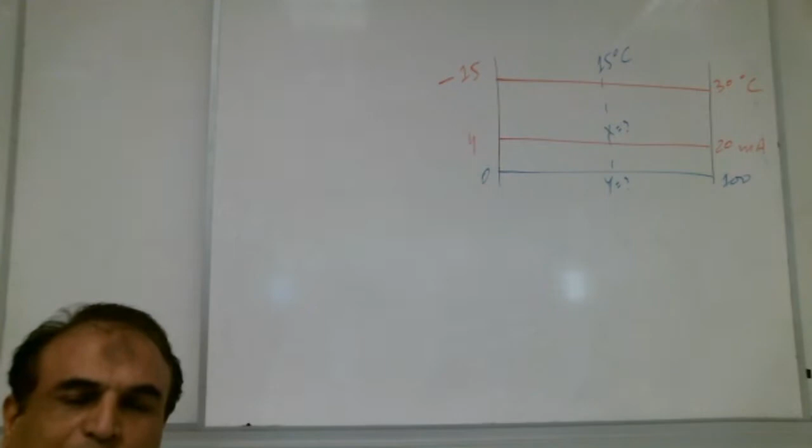Shabab, you guys can see the board, right? Yes. So the question is already there. The temperature is from minus 15 to 30 degrees centigrade, right Shabab? See here, minus 15 to 30 degrees centigrade, this is the range of the temperature. We need to convert into milliampere. The standard signal is 4 to 20 milliampere, and we need to convert into percentage signal from 0 to 100%. So please solve it, get the first.

Solve it and show me. Get the first.

Some brother is trying, Shabab. Yes, I am trying. That's good, a lot of brothers are sending me the message. Teacher, I finish, just please show me. What is your answer? I will show you teacher, please, one minute.

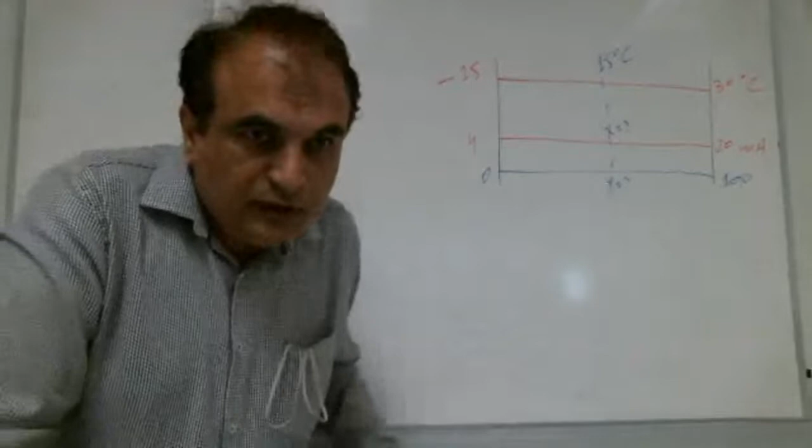Teacher, you see? X minus 4, 20 minus 4, then 15 minus minus 15 over 30 minus minus 15.

That's good, your procedure is correct. Y minus 0 over 100 minus 0, 15 minus minus 15 over 30 minus minus 15. So your procedure is correct. So what is your ID, brother? Tell me your ID.

I want to tell you something teacher, there are 2 students with the last 3 digits 158, so be careful. No problem, you please, tell me your ID. 391 902 158. That's 902 158, okay good.

Shabab, please see here, other brothers see here. So this brother will help me in doing it. Very good, this brother Awad is also showing, Ali Ahmad Awad. A lot of other brothers are also showing. Very good, brothers, very nice. So yes brother, tell me how to write the X.

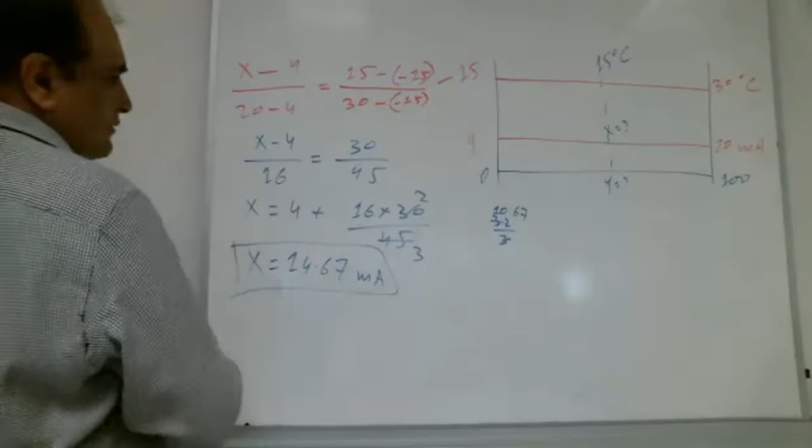Okay Shabab, how are we going to write the other part, the percentage part? Y minus 0 over 100 minus 0 is equal to same 30 over 45. Right Shabab?

Everybody with me, Shabab? Yes, with you teacher. So Y is equal to 30 into 100 over 45. How much, Shabab? 66.667, that's 66.66%. Right Shabab? Yes. Any question up to here, please ask.

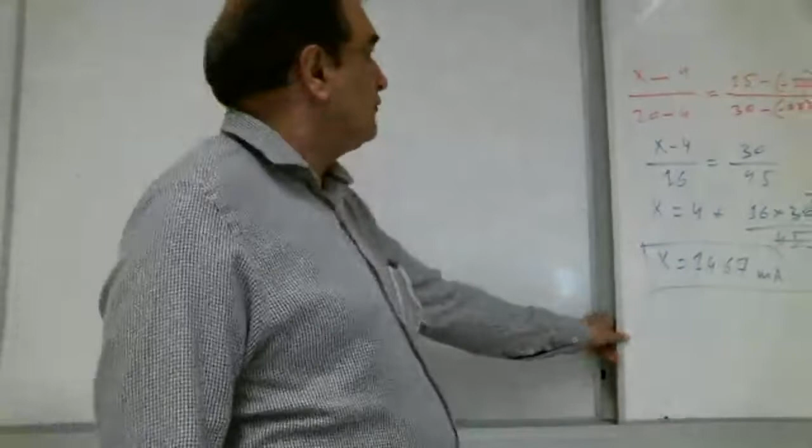Yes Shabab, who will read the next question? Question 1.5 on page 15, please read. Yes Shabab, please read the question 1.5, page 15. Yes Shabab, who's writing? Teacher, in which book, practical book? No, no, in theory book.

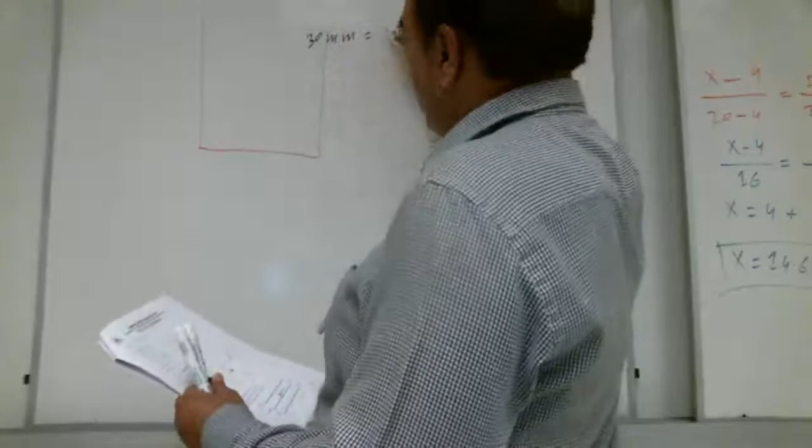So, what is the calibration, Shabab? 30 millimeter equal to 4 milliampere, right? This is the calibration for this level tank, right?

Shabab with me? Okay, now what is the current process variable? Right now, how much does the tank have? 70 millimeter. Right now the tank has 70 millimeter. So we need to find PV, in milliampere and percentage. Both PV we need to find.

That's good, lot of brothers they are replying yes. Okay Shabab, what is the procedure? We always draw the two lines. How do we draw the two lines? Like this.

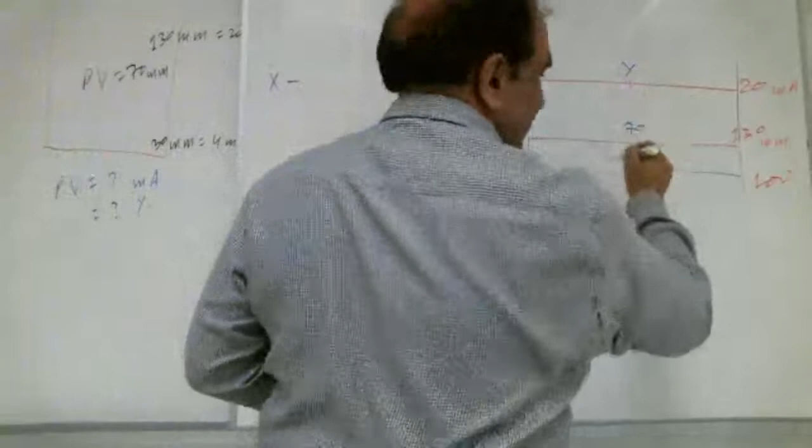So how will we find X? Use the two-line method, teacher. X minus 4. So here it is X, and how much is here? 70 millimeter, right Shabab? So X minus 4 over 20 minus 4.

20 minus 4 is equal to 70 minus 30, over 130 minus 30. So how much is this, Shabab? X equals 10.4.

You are correct, but let's solve it a little bit. So 70 minus 30, how much, Shabab? 40 over 100. So it will be X is equal to 4 plus 4 into 16 by 10, right Shabab? So it will be equal to 10.4 milliampere.

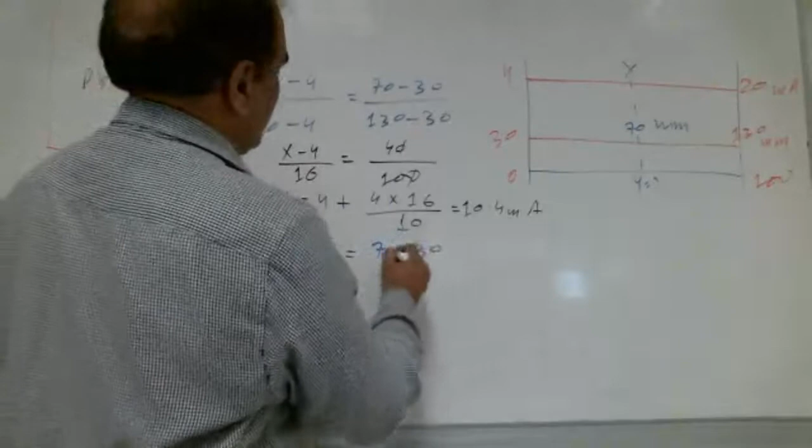Y equal 40%. And Y is equal to, same way, we're going to write Y minus 0 over 100 minus 0 is equal to 70 minus 30 over 130 minus 30. That will bring Y is equal to 40%. Everybody with me, Shabab?

Yes teacher, yes, that's good. Lot of brothers they are saying yes, inshallah. That's good, yes. Read the part B, brother. Now what is the part B? Yashima, please read the part B.

So we put here one. Let me draw it a little lower because it is not coming in the camera correctly. So we have a tank here. Its calibration is 30 millimeter, 4 milliampere, 130 millimeter, 20 milliampere. This is the calibration. Here we put a temperature indicator transmitter, a level indicator transmitter, Shabab.

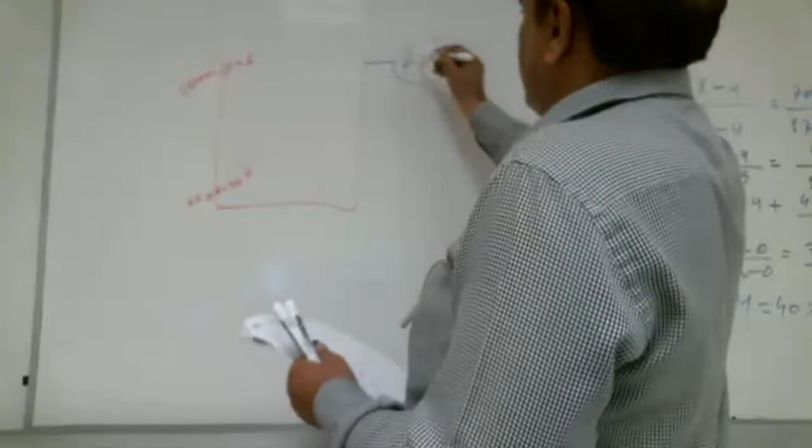Level indicator transmitter, that will send the signal to the level indicator controller. This is the set point. This is what, Shabab? Electrical signal, teacher. PV. Very good. Lot of brothers they are replying PV. Very good, Shabab.

This is coming here. We put here I to P converter, and on this side we put the valve. Control valve is there, and this control valve is, Shabab, normally open or normally closed?

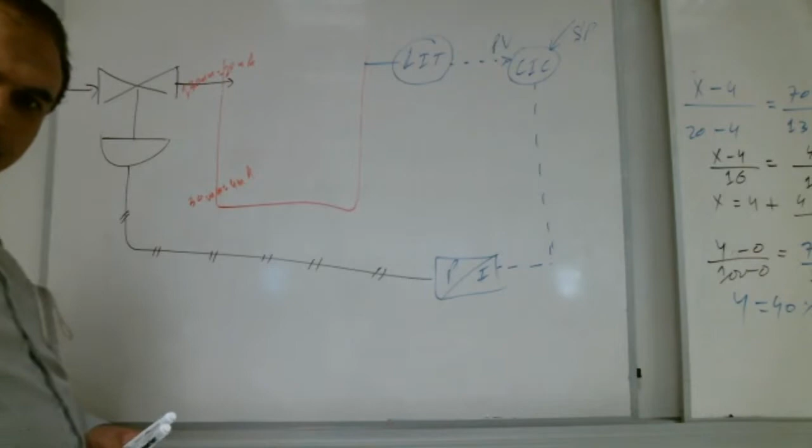This valve is normally open, normally closed. Check the diagram, it is written there. Normally closed, very good, lot of brothers they are saying normally closed. Please check there, it is written like here, normally closed. Very good, very good, okay Shabab.

Please read the part B. Yes brother, please read the part B. Who's gonna read? Can I read? Yeah please, please. Okay, assume the output of the controller is 30%. This is the output of the controller here, Shabab. This one, how much? 30%.

30%, right? Calculate the signal before and after I to P, input and output. So we need the signal here and here, before and after I to P converter. Before I to P converter it is electrical signal, right? And after I to P converter it is which signal? Pneumatic, pneumatic signal. Shabab with me? Everybody with me, Shabab?

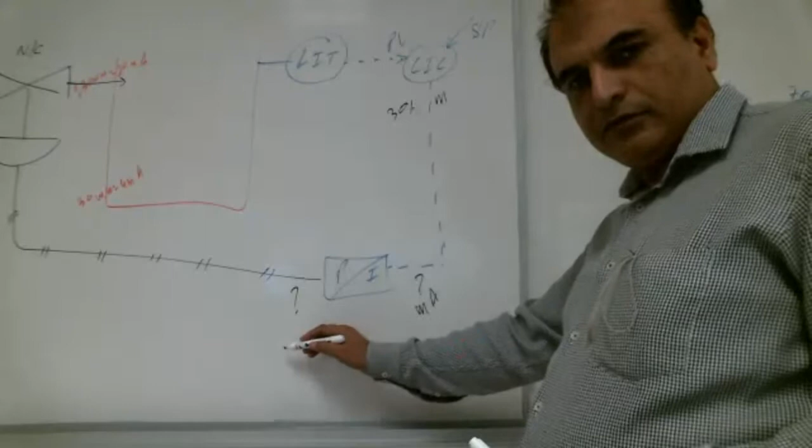Yes, yes teacher, yes, that's good. So what is the output of the controller? 30%, right Shabab? So we need milliampere here, and here we need what? PSI, very good, Muhammad Salim Zahri is replying. I know a lot of brothers are replying. Here we need PSI, very good Shabab.

So again, our old friend two-line method is there, right Shabab? So we bring the two-line method again into action. So you can see the lines, right?

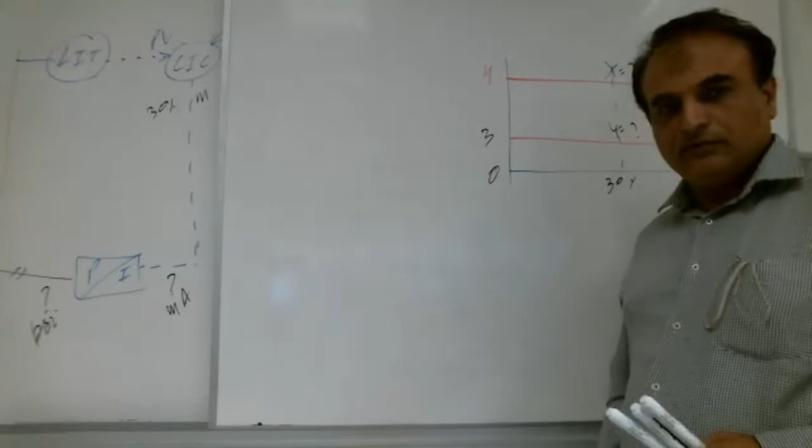So here 0 to 100, 4 to 20 milliampere, 3 to 15 PSI. Shabab, how much is the output of the controller right now? 30%. So 30% is here. Find X, find Y, show me the procedure, get the first. 8.8 milliampere, show me the procedure.

Yes Shabab, please show me the procedure, get the first. Here, this brother is showing. You remove it. Yes sir.

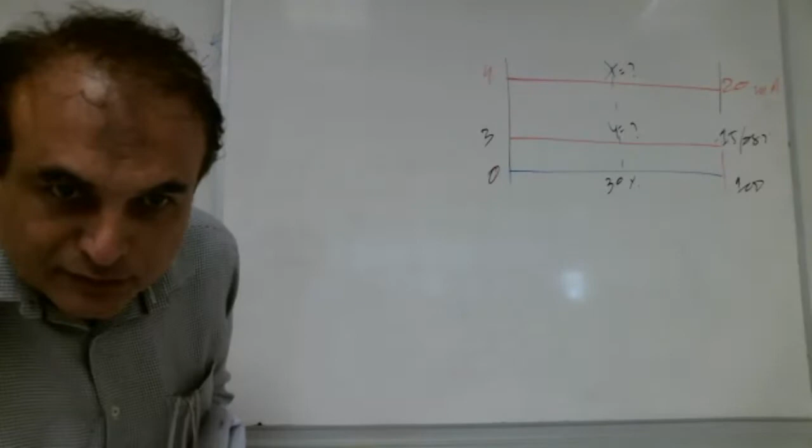This brother is showing X minus 4 over 20 minus 4, equal to 30 minus 0 over 100 minus 0. Yeah, your procedure is correct. So what is your ID, brother? Tell me your ID. 698. 698, that's good.

So we already have solved this example, if you guys remember. So X minus, tell me how to write it. X minus 4 over 20 minus 4, very good. Equal to 30 minus 0 over 100 minus 0. Very good. So when you solve it, you will get X what? 8.8 milliamp. And the same way for Y, we can write.

Yes Shabab, please tell me how to write for Y. 30, 100. 6.6, so it's 6.6 Y, PSI. Yes, so this is our part B, Shabab. Part B.

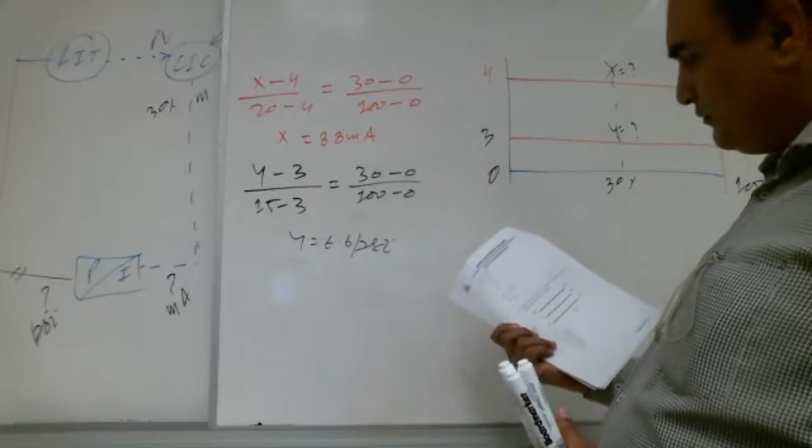The part B, second part is how much the valve is open if it is a normally closed valve. How much is it open? 30% open teacher, right? It will be 70 teacher. How much? Can it see from here? How much valve is open and how much valve is closed?

What is our valve, Shabab? What is the type of our valve? Normally closed, very good. A lot of normally closed replies, normally closed, right? Okay, that's good. So this is our output of the controller, 0 to 100%.

And this is our normally closed valve. That's what we have here. Our valve here is normally closed. See, on the other side, you can see in the P&ID diagram, normally closed valve. So at zero signal, it should be 100% closed. At 100% signal, full signal, 0% closed.

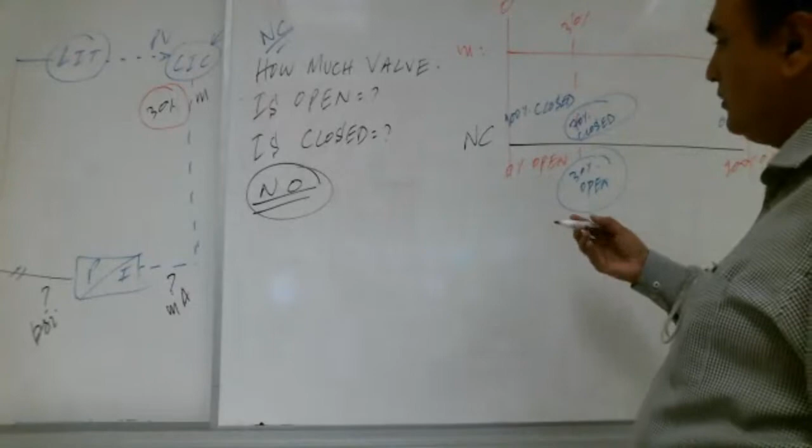No problem, we will take another valve, Shabab. We will take the normally open valve. Now our valve is what, normally open, right Shabab? What is our valve now? Normally open. So we extend this diagram. So what is our valve now? Normally open. So for normally open, here 100% open.

Yes, very good. Here 0% open, and here 0% close, and here 100% close. How much is the signal, Shabab? 30%, this one here. So how much? How much open? 70% open. Because this is the signal, 30%. So 100 minus 30 is 70. And how much closed? 30% closed.

Very good, a lot of brothers they are replying, mashallah. Very good. Any question up to here, Shabab? A lot of brothers are saying no question. Okay, please read part C, Shabab. Please read part C. Yes brother Abdul Malik, please read part C. Brother Abdul Malik, is he there?

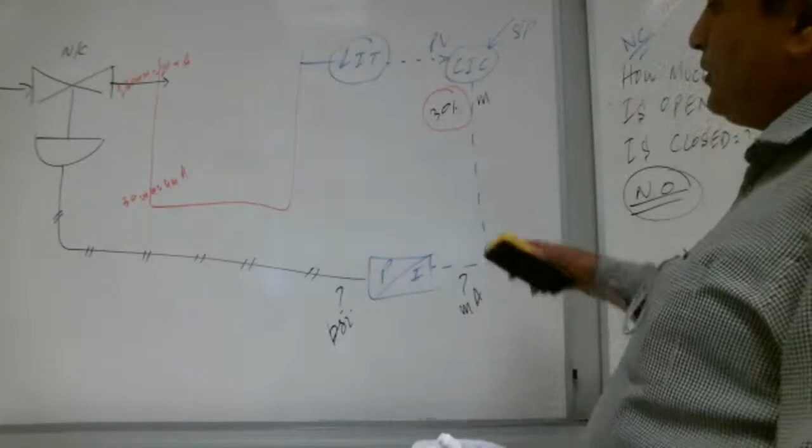Yes, you please read. Assume same valve is 30% close, find the signal before and after the I to P converter. No, before the B part, it was the output of the controller is 30%. No, output of the controller is not given. So what is given, Shabab? No, this valve is given. This valve is given now. How much this valve, Shabab? 30% close, this valve is 30% close.

Shabab, with me? This valve is 30% close. And what do we need to find? Signal, PSI and milliampere before and after the I to P converter, right Shabab?

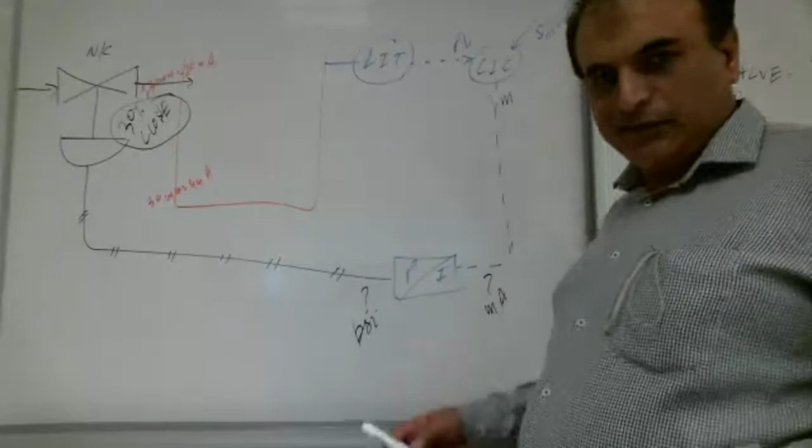Everybody with me? Yes. Okay, a lot of brothers are saying yes. That's good. So before, output was given and we find these signals.

Now the valve is given 30% close, normally closed valve, 30% close. Right, Shabab? And we need to find these two signals. So what should be our strategy? How are we going to find them?

Yeah, Shabab, how are we going to find them? Two-line method, lot of brothers are saying two-line method. So what should we find first? Because the two-line method we can apply if we know the output of the controller.

Here we just know the 30% close, valve is 30% close. So can we find output of the controller from here? If the valve is 30% close, can we find the output, Shabab? Yes, we can.

So the valve is first normally close. Valve is normally close, normally closed valve, and right now it is 30% closed. This is given: normally closed valve, 30% close. So the signal is there, normally closed valve, we need this one. So let us remove this one.

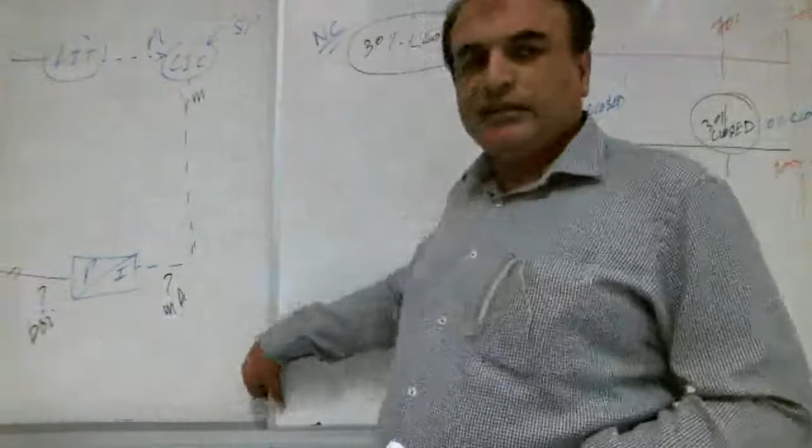70%. Very good. 70% signal is there, so now we found the signal. If we know the signal, can we find the milliampere and PSI? Can we find it, Shabab? Yes, yes. This is very straightforward now. Same way, we're gonna draw the two-line method.

What is the signal, Shabab? 70%. 4 to 20 milliampere, 3 to 15 PSI, and this is 70% signal. Find X, find Y. Any question up here, Shabab?

One brother is asking why 70. Let me explain once again. See here, valve is what? Normally close, right, Shabab? Valve is normally close, and right now it is 30% close. That's what is given, 30% close.

So we need to find these two signals, milliampere and PSI. These two signals we need to find. Now we cannot find them until unless we know the output of the controller. We cannot find them. So from this 30% closed valve, we will try to find the output of the controller like this.

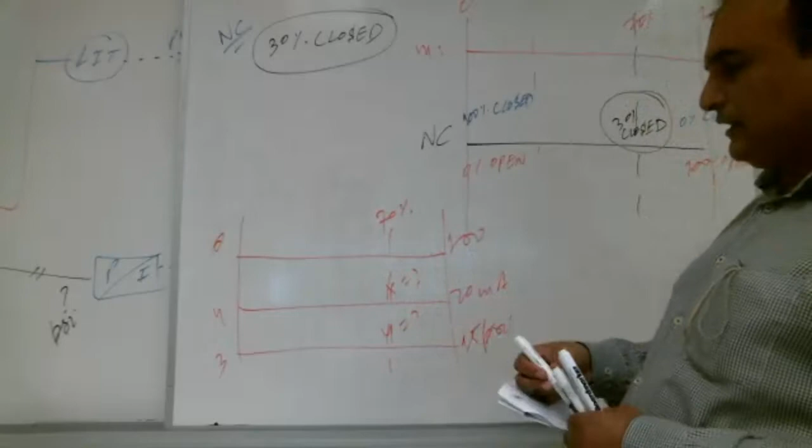Sir, any question? X equal 15.2 milliamp. Yeah, you can find it. I know, mashallah, every brother can find it. The main thing is here, how to find the signal from the given control valve, right, Shabab?

Any question up here, example, Shabab? Please ask teacher. If he gives me 40, the normally close will be 60. Sorry? If you give me the number 50, for example, or 40, close it, the 40% close, you mean? Yeah, say okay, you say 40% close, for example, it will be 60, teacher.

The signal will be 60. See here, 40% means where? Where will it be, 40%, 60? This side or this side? Where? Here, teacher, this in the left, 40%. Here, right? Yes. So this 40% closed.

So how much is the signal? 60%. Yes. Okay, I understand, that's good, mashallah. Any other question, Shabab? Please ask.

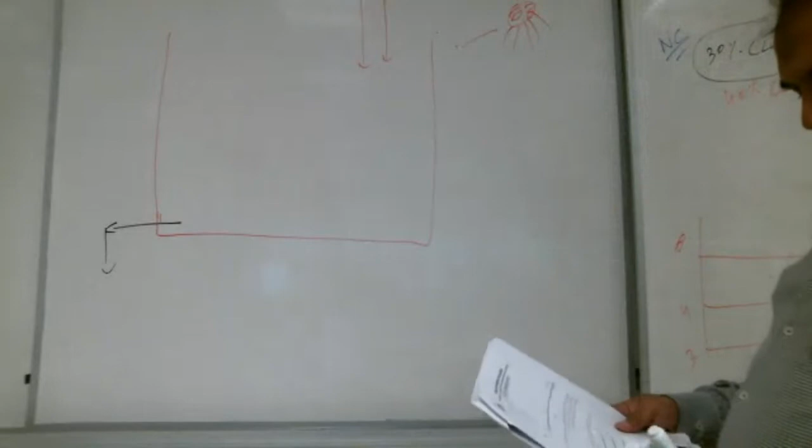Yashima, who will read the question? Please read the question. Describe the type of control system as follows. Yashima, what type of control system is this?

Manual control system, right Shiva? There is a human being, he is standing there and he will control the system, right? So it is manual control system. So what is the B part, Shiva?

We want to change it in automatic control system, specify instruments and devices. So we will change it to automatic. Have we done it before? Yes. Did we discuss it before, Shiva? Yes, lot of brothers are saying yes, mashallah.

So it means the brothers are remembering, mashallah. Also brothers, please revise. So today we will again discuss it with a little bit more detail, right?

So which side should be the sensor, Shabab? This side or this side? Where should the sensor be, the human side or the other side? Lot of say human side. Because the human being is on this side, it means he's watching here.

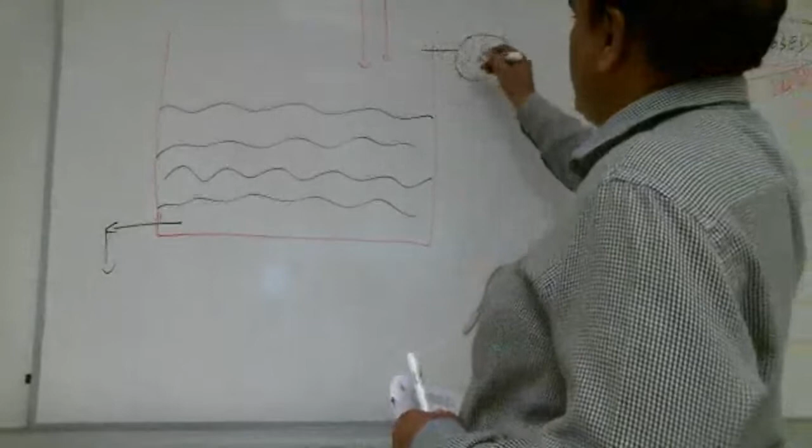So the sensor should be here, right? So we will put the sensor here, level indicator transmitter. What is inside level indicator transmitter, Shabab?

What is inside it? Sensor, teacher. Just sensor or something else also? And indicator. Transmitter. Very good, three things are there.

Sensor, level sensor, this is one thing. Then level, indicator, and transmitter. Right, Shabab? So all these three things, what we say: level, indicator, transmitter. Shabab with me?

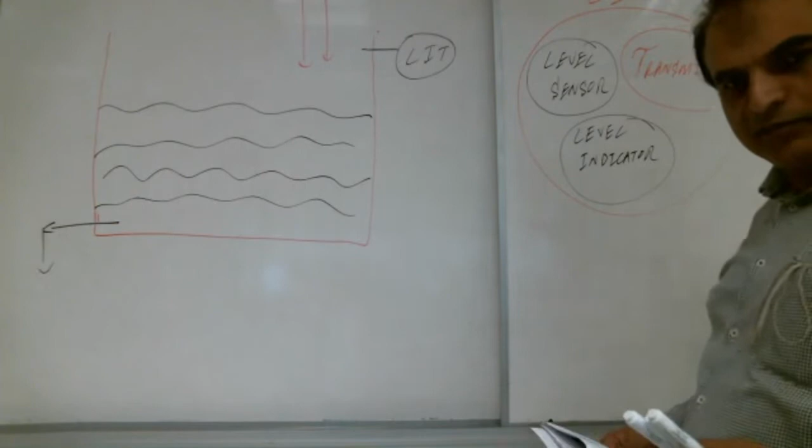That's good, lot of brothers they are sending messages. Yes. So if you don't want indicator, you can remove it. If we remove the indicator, so what is now? Level, transmitter just. Shabab with me?

So if you want to have the indicator: level, indicator, transmitter. If you don't want to have the indicator: level, transmitter. That's good, lot of brothers they are saying yes, they are understanding, okay that's good.

So what is next, Shabab? This signal will go where? Controller. So level, indicator, controller.

What is the name of this signal, Shabab? Is this PV or SP? PV. MashaAllah, lot of brothers, they are sending the message PV, that's good. And SP, we already applied it, right Shabab?

Okay, right. Now, final control element should be where? This side or this side? Where should be the final control element? See the diagram, where is the hand? Left side.

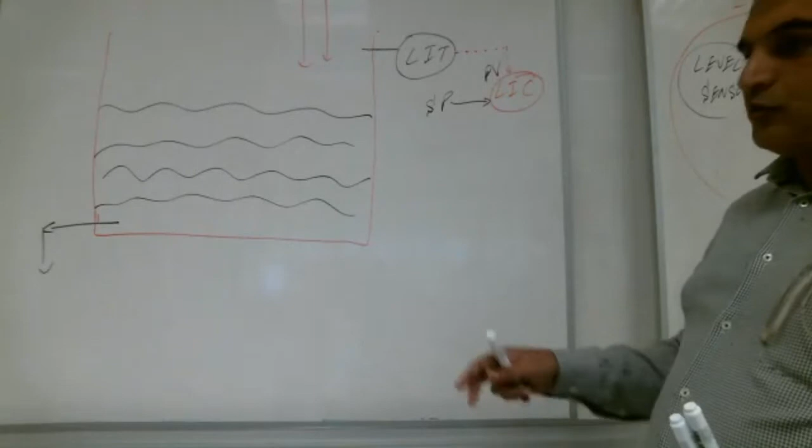Where is the hand of human being, Shabab? Please see the diagram, in the right side with the sensor. So the final control element, because he is, maybe there is a manual valve there, so that's why he is bringing his hand towards it. Right, Shabab? So it is better we put the valve here.

So what type of valve should we put? We are using control valve, Shabab. And is it inlet valve or outlet valve? Everybody with me, Shabab?

Yes teacher. So can we give the signal directly to it like this? No, we need a converter. Very good, very good. Because this is electrical signal, this valve needs pneumatic signal. So we have to put an I to P converter here like this.

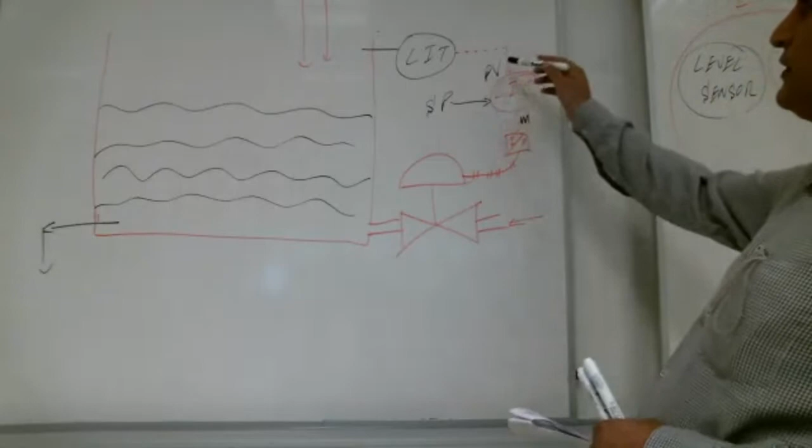Is it a complete loop, Shabab, now? And this is output of the controller. This PV, this SP, output of, is it complete, Shabab? Yes, brother, it is complete, yes.

What is the type of the valve? We didn't mention it. Without the type of the valve, it is not complete. It should be normally open or normally closed. What should it be, Shabab? Normally closed. Why normally closed?

Because we need to fill the tank, okay, and after that... yeah, that is better, that is good, good logic. So if the valve is here and it is inlet valve, it should be normally closed.

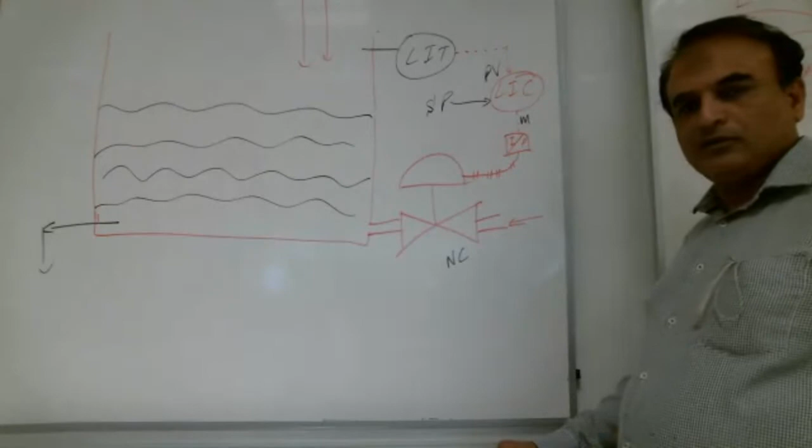Right, Shabab? If the valve is here and it is inlet valve, the water is entering through it, it should be normally closed. Is it a good place to put the inlet water? Is it good place? No, teacher, inlet water, it is not a very good place.

And this output of the controller we bring here, we put an I to P converter and put it like this. Lot of brothers now they cannot see, let me make it a little down.

And now you can see, this is our valve, Shabab. And output from the controller, we are bringing through the I2P converter here.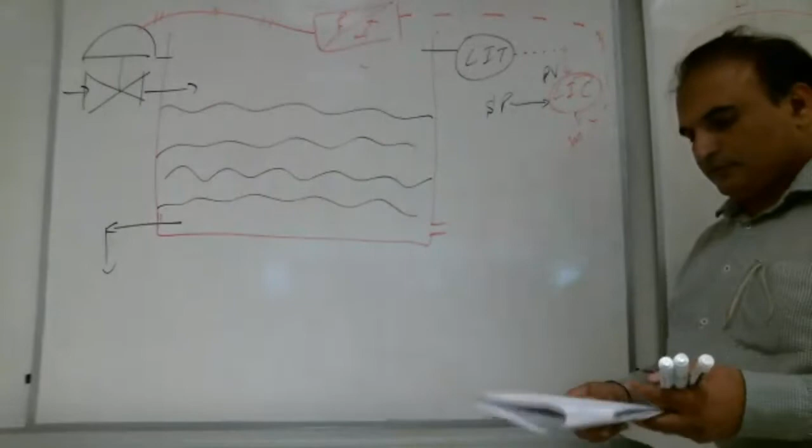Right, Shabab? Now, here this valve should be normally open or normally closed. Which one is preferred here? A lot of brothers are saying normally closed, a lot of brothers are saying normally open. Because here there is no way that you lose the water, or it goes back, so here we prefer to be normally open. Right, Shabab? And especially imagine here the Marafiq water is coming.

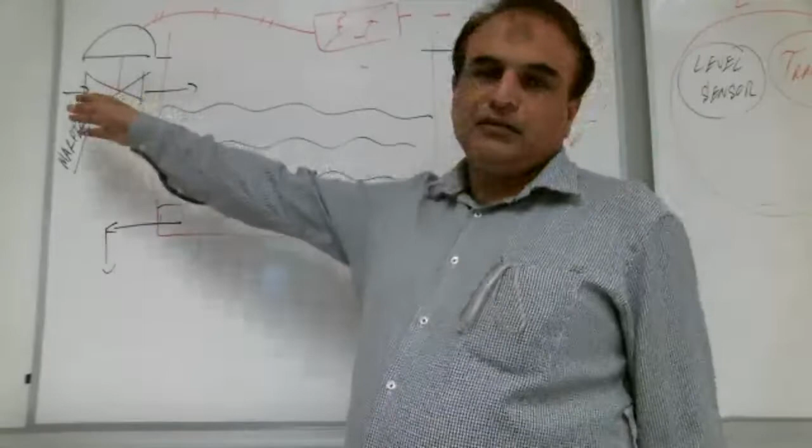Here the Marafiq water is coming here, so it should be normally open. Right, Shabab? Everybody with me? One brother is asking why it should be normally open. Now, for example, if it is not normally open, it is normally closed, right? Yes, you have to open it all the time whenever you need the water, right? But if it is normally open, all the time water is coming, and as soon as the tank will fill, the controller will close the valve. Right, Shabab?

It means, teacher, it depends on what we want. Yes, obviously, that's what we are discussing - how to design the things, how to do it the better way. Any question up to here, Shabab?

Can we put here some other type of valve? You guys remember we discussed 4 types of valves, so can we put here another type of valve? A lot of brothers are saying yes. Suggest some type, tell me which type we can put. I think we can put a motorized valve. Motorized valve we can put, yeah, but again, we prefer the control valve.

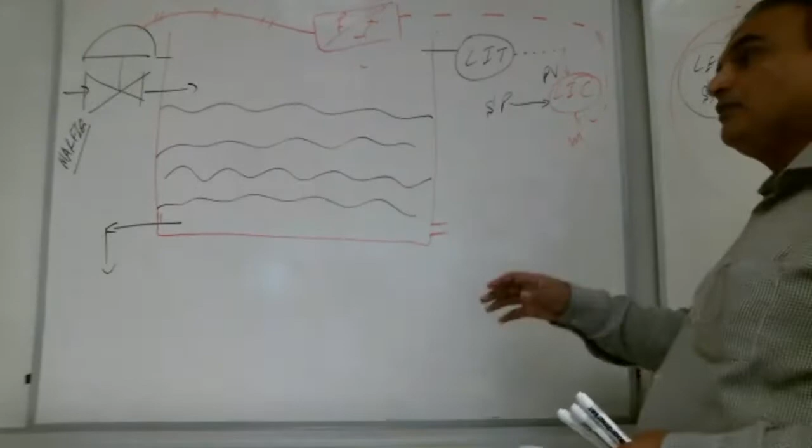What is the reason? Inshallah, as we go more and more, we will discuss more, and you guys will get the idea about the beauties, the advantages of the control valve. But keep this question: even if we put here, for example, a solenoid valve, then it will not be continuous control, it will become like on-off control. We want continuous control, so that's why we put this valve. In continuous control, yeah, we can put a motorized valve, but that has some disadvantages and some advantages too, so we prefer control valve. Inshallah, as we go further, we will describe the advantages more and more.

Yes, Shabab, question number 2. Teacher, can I read? Yeah, please. Is it from the diagram shown as follows, right teacher? Yes, there is a diagram, and it says identify if there are any errors.

Yeah, Shabab, is there any errors in this diagram? You guys have seen this diagram before? Okay, tell me the symbol - the pneumatic signal, the valve, teacher. MashaAllah, a lot of brothers, they are sending the message - the valve, teacher. Valve is wrong, you mean? Yes.

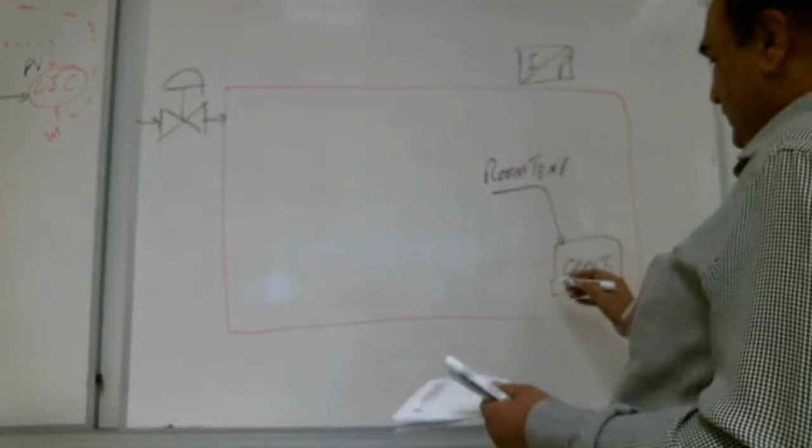The controller is here, the room setting, room temperature is here. Temperature setting is here. Right, Shabab? There is a bulb here, light bulb, it is sending the light. And there is a heat loss here, heat loss. There is a heater here, heater, and it is also sending the heat.

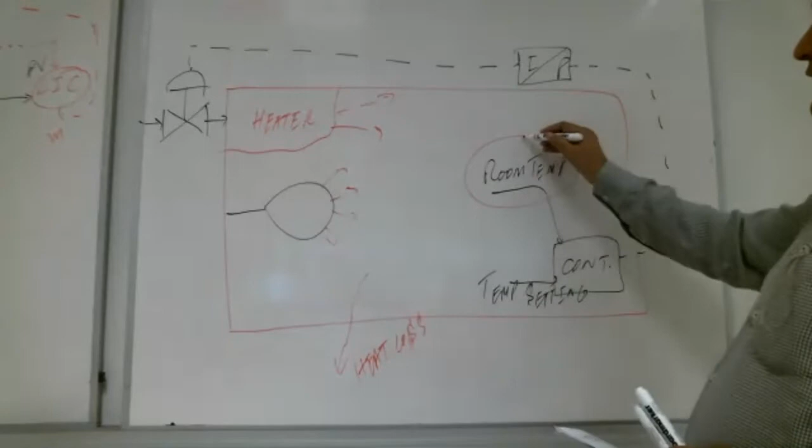Yeah, Shamal, what is the mistake? What is the error? Teacher, I think there's no sensor. Huh? Sensor is there, room temperature - this is the sensor, the sensor, PV. This is the temperature setting, SP. So what is the error? What is the mistake?

Yeah, very good. A lot of brothers, they are saying the signal doesn't change. The output of the controller is electrical signal, we all know that, right? And it is going to the I2P converter, and after that it should change. But again, we are putting the electrical signal. Shabab, with me? Yes, it should be pneumatic signal. First of all, this is wrong - we need this side pneumatic signal, right? So this signal should be pneumatic. This signal should be like this, Shabab, right?

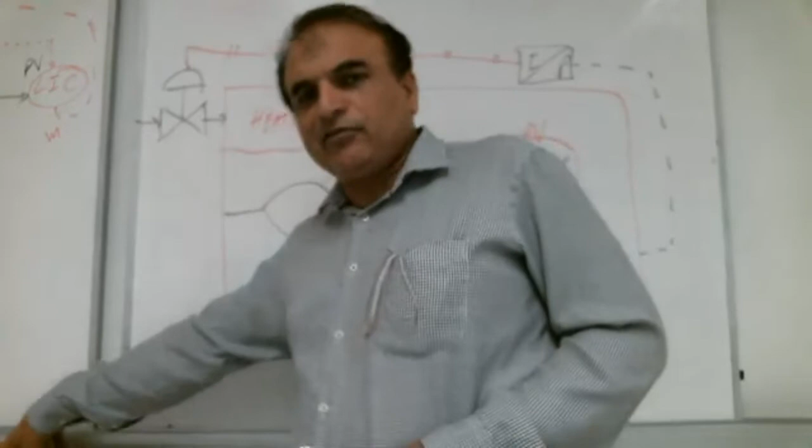Why, teacher? Okay, the I2P converter is good, like this. This I2P converter is good like this, Shabab. I think we have to flip it. No, a lot of brothers are saying no. Very good, very good. Delete input, teacher, delete. The I side should be this side - this is the I side, current is coming from this side. This is I, this is P, pneumatic P side, this is I side. Right, Shabab?

Yes, so one mistake was the signal, the other mistake was the I to P converter. Any other thing we need to fix? Yes, Shabab. Teacher, the type of valve. Very good, very good. So what is the type of valve, Shabab? Is it mentioned? It is not mentioned, right? So this valve should be what type?

Normally closed. Brother, why is it normally closed? A lot of brothers are saying it is normally closed. Why, brother? Why should it be normally closed? What is the reason?

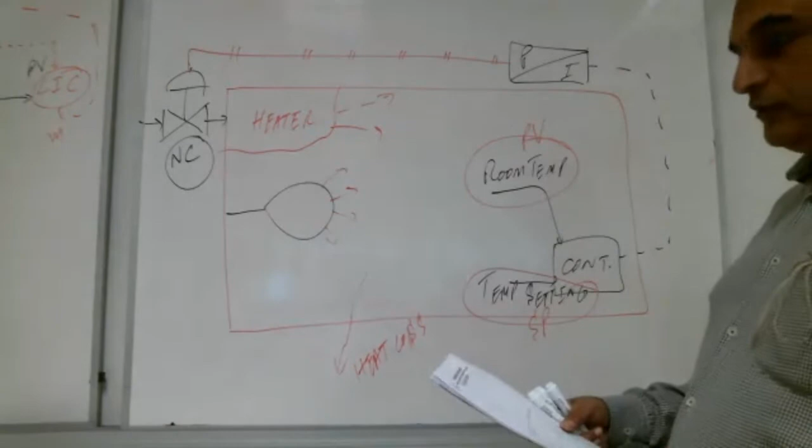Because it is pneumatic, teacher. No, no, this is not the reason. It can be normally open, but here they are saying normally closed. Why normally closed? I think, teacher, because we don't need to lose the temperature. Because heat, teacher, not fluid.

This valve is bringing what, Shabab? Heat? This valve is bringing fuel. It is written there, fuel supply. Did you guys see that, Shabab? Fuel supply, right? It is bringing fuel. Maybe steam it is bringing, right, Shabab?

So now imagine the valve between the benzene tank and car engine should be normally open or normally closed? Normally closed. So whenever we want, it should get open, right? Yes, whenever we want it should get open. So this valve is the same because it is bringing fuel. It is money, expensive, so whenever we want, it should get open. Otherwise it should be closed.

Shabab, with me? Yes, with you, teacher. So that's why we are saying it should be normally closed. It is all the time closed, and whenever we want, we can open it and bring the fuel.

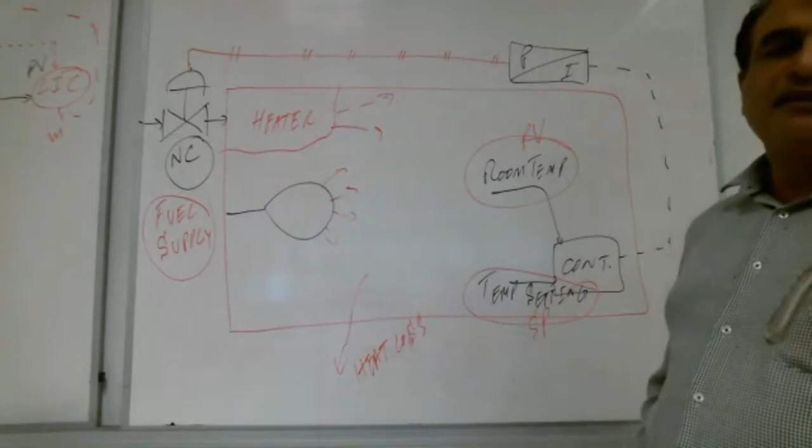Part B, please read part B, brother. It's a basic element of process control. Identify the basic elements of process control.

How many basic elements you have for the process control? Six basic elements. Which ones? Process, measurement, set point, what are the control elements you have?

Okay, I will check. Process, teacher. Controlled variable. Number one is controlled variable, Shabab. So what is the controlled variable here? So what we are controlling here, Shabab? Temperature, very good. A lot of brothers are saying temperature. So we are controlling temperature here.

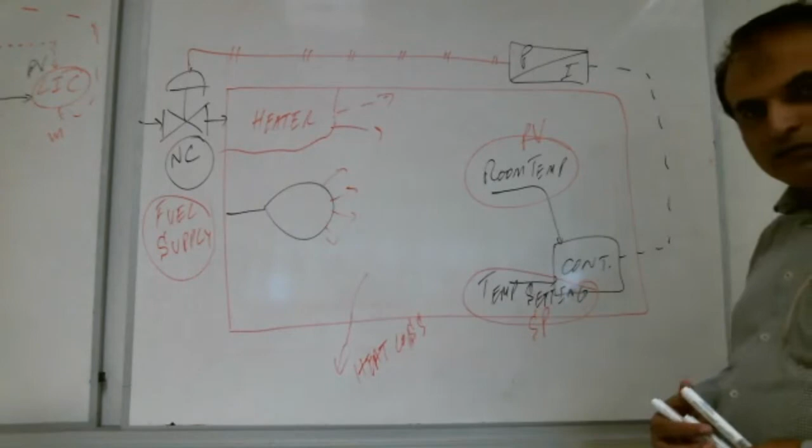What is the second? Set point. So where is the set point, Shabab? Very good, a lot of brothers are saying here, temperature setting. It is written here, temperature setting, Shabab. This is the set point.

What is next? Measured variable. What we are measuring here? So what are we measuring here, Shabab? Temperature. Very good, very good.

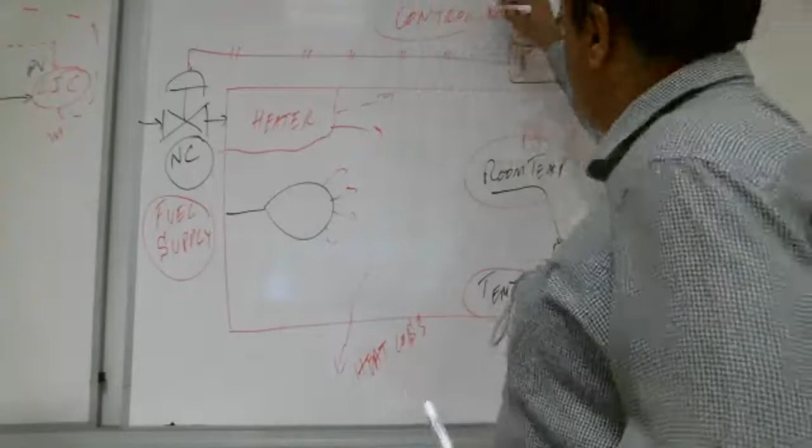Where is the error here, Shabab? This is PV, measured variable, room temperature, because you also need to identify it on the diagram. This is PV. Where is the error? Error is where, Shabab? Very good, a lot of brothers are saying in the controller. Where is the controller, Shabab? Here, this is the controller. This one is the controller.

So error is equal to what? Error is equal to SP minus PV, or PV minus SP. This is for direct action, this is for reverse action. Inshallah, we're going to discuss them in detail soon. So error is here.

What is next, Shabab? What is next? Final control element, teacher. No, process. What is next? Disturbance, teacher. Disturbance, very good.

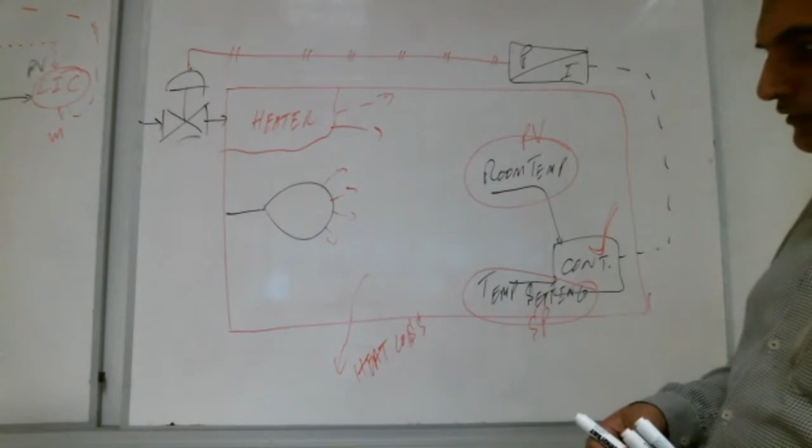Very good, very good. Where is the disturbance here, Shabab? You guys remember last week one brother asked me, what is disturbance? Now this is a very good example for disturbance. So where is the disturbance? The bulb, teacher, the lamp. This is disturbance, very good. This is one disturbance.

This is the second disturbance, heat loss through the wall. See, this is the wall of the room, and heat is losing here, right, Shabab? Everybody with me?

Shabab, everybody with me? This is heat loss, and this is light. So both are the disturbance for the process. This is the process, so both are the disturbance for the process. Shabab, with me?

That's good, a lot of brothers are sending messages, very good. Okay, what is next, Shabab? The sixth element of the process control. What is its name?

Calculated variable. Manipulated variable or calculated variable. So who is calculating? Is the sensor calculating? No. The controller. Who? Controller, very good.

This is the controller. So the output of the controller is the manipulated variable, MV. This is the manipulated variable, output of the controller. That's what the manipulated variable is.

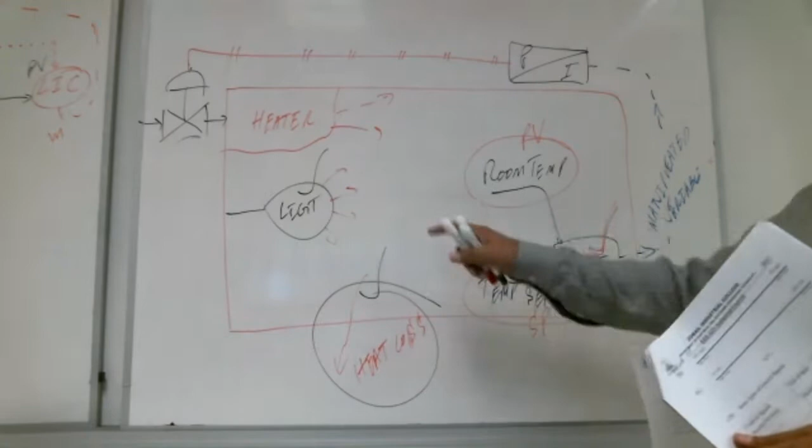Shabab with me? A lot of brothers are sending yes. Where is the set point? This is the set point.

This is the process variable, room temperature. It is taking, this is the sensor. Room temperature PV is coming from here. Measured variable. This is what, Shabab?

Measured variable. Error is here in the controller. Error, disturbance, these 2 things are disturbance. And then manipulated variable, that is here. Manipulated variable. Right, Shabab? Any question up to here, Shabab?

Yeah, Shabab, any question up to here? A lot of brothers are saying no question.

So, from here, Shabab, question number 1 to question number 8, it is the homework. So you guys gonna solve it and gonna submit it. Right, Shabab?

Everybody with me? What's the homework, teacher? This is the homework, let me show you.

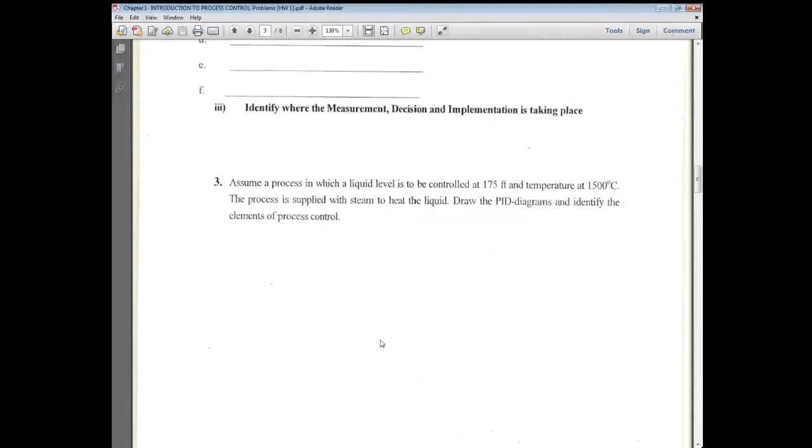This is the problem, question number 1. This is question number 1, Shabab, right? Shabab with me? This is question number 2. Shabab with me?

This is question number 3. This is question number 4. This question I cancelled, so this is question number 5. Right, Shabab? And this is question number 6, and it has some parts.

Right, Shabab? So up to here, you guys, inshallah, gonna solve it and submit the homework. Right, Shabab? Which question is cancelled, teacher? It is crossed, already crossed there.

Yes, teacher, student, you can upload the soft copy in Blackboard. It is already uploaded. Okay. It is already with you.

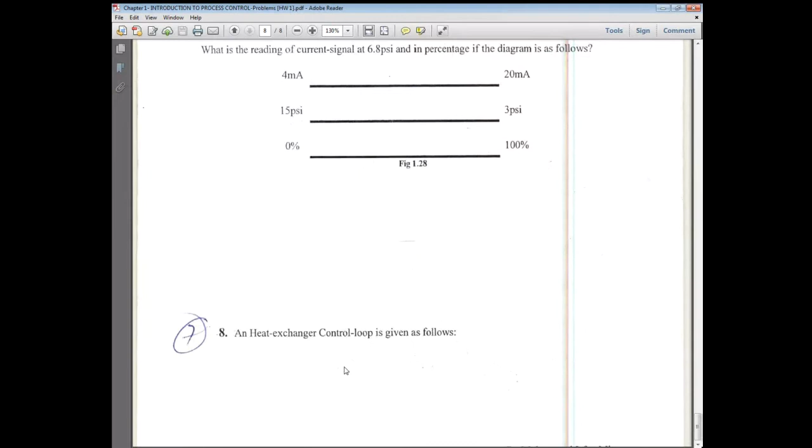Okay, Shabab, what I want you guys to do, because this homework you can take from any elder brother, any brother from the last semester, previous semester, Shams Copy Shop, anywhere you can take it. Why do I want you to do it and submit it? Tell me, who gonna tell me?

Practice. Practice can be, what else? Yes, Shabab, quiz. You take this homework, Shabab, you take the copy from any brother.

You know, yeah, very good. Some brother is saying make sure you are understanding. This is the point. So you take the copy of the homework, no problem. It is already, you can take from a lot of places. Put it under your desk, then start solving by yourself.

Solve by yourself question number 1. Compare with the already solved copy you got from somewhere. Same way, solve all the questions by yourself and then compare them with the already solved solutions.

Right, Shabab? So this way, inshallah, you will learn a lot. Shabab with me? Yeah, a lot of brothers are sending message, yes.

So again, you can take the solution from any brother, from Shams Copy Shop, here and there, no problem. But please don't see them. Don't see them, you know, and you just see after you first solve them, and then you will compare with the solution you already have, and this way you will learn, inshallah.

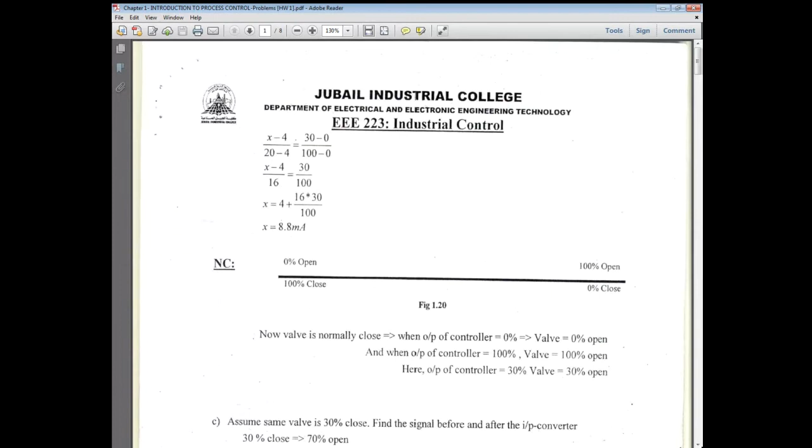Yeah, Shabab, any question up to here? Teacher, I have a question. What about TC and TT? TC is temperature controller, TT is temperature transmitter. We just discussed it. Thank you, teacher. You are welcome.

Now we are starting chapter 2. The first article is first order system.

Have we heard this before, Shabab? First order system? A lot of brothers are writing yes. So where did we see it? In practical. Very good, mashallah, the brothers are remembering. So how do we define the first order system, Shabab?

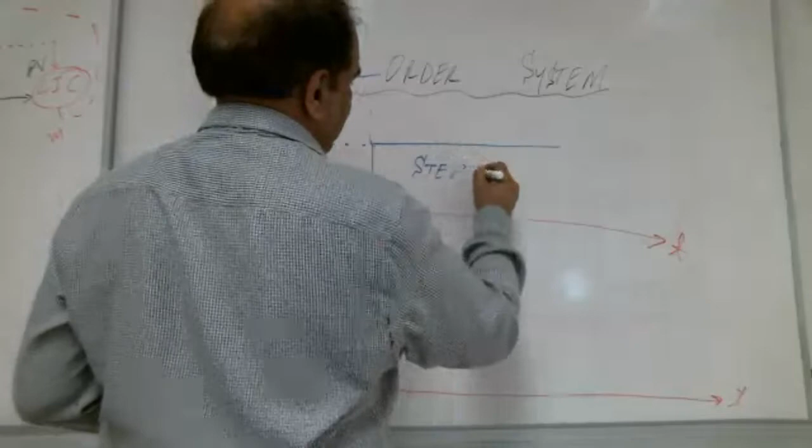What type of input is this, Shabab? A lot of brothers are saying different things, but its name is step input. If you guys remember, we explained it in practical. And the output comes like this, smooth, like this. Smooth and gradual, and reaches steady state.

Steady state. The system, what do we call this, first order system? Shabab with me? A lot of brothers are writing. Shabab, say something. Is everybody with me or sleeping? That's good, minimum one brother is replying. That's good, lot of brothers are writing, mashallah.

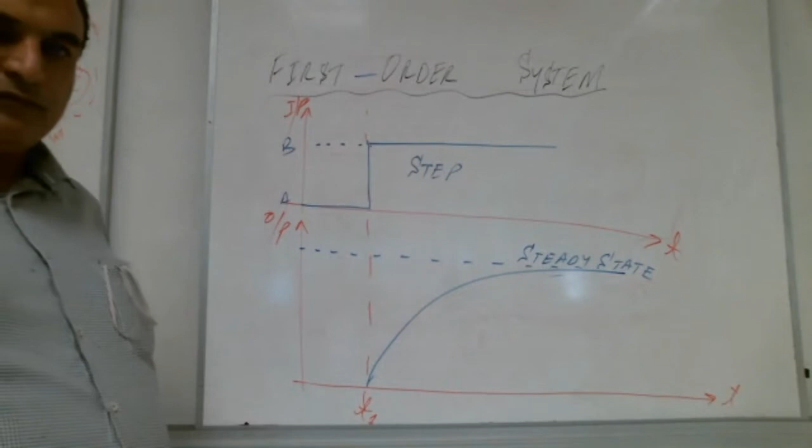Can you guys give me some example for this first order system? Please give me some example. AC condition, on-off of light. Okay, any other example, Shabab? AC condition.

What about the rooftop tank? Is it first order, the filling of the rooftop tank? Filling of the benzene tank, some brother is writing. Take this tank, rooftop tank, so the water is coming and it is increasing gradually.

First here, this PV1, PV2, PV3, PV4 and so on. Is it coming gradually or all of a sudden? Yes teacher, gradually and smoothly. So we apply, the water is coming and the level is increasing gradually and smoothly. So somehow if somebody closes the pump and turns it on again, maybe then it is not first order.

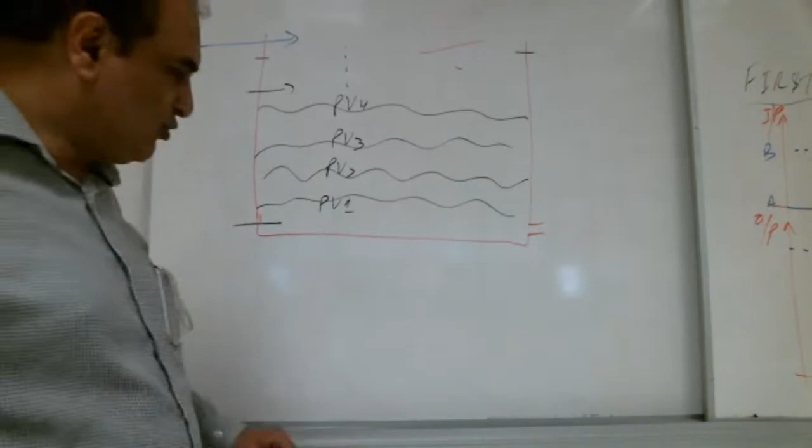What about the capacitor, Shabab? Charging of capacitor. You guys remember the charging of capacitor? A lot of brothers are writing yes. You guys remember the capacitor, right? Yes, the capacitor, instrument one.

This was the capacitor. To charge the capacitor, again it is first order, right Shabab? The charging of the capacitor, you will see the same waveform as the charging of the capacitor. A lot of brothers are writing yes, mashallah, they remember and they see it.

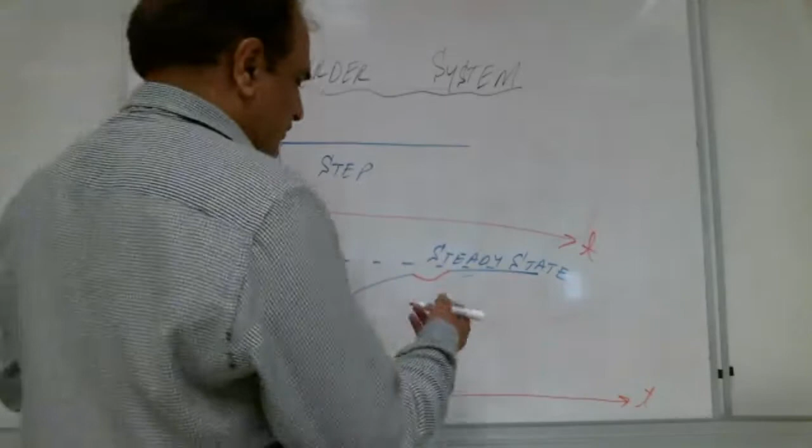Now if the input is like step, this input, and this is the output, gradual and smooth, going to steady state, what is the name of this system? First order system. If for example the system starts oscillating here, Shabab, starts oscillating like this, is it first order anymore? No, it is not first order. Maybe second order, maybe whatever order, third order, but it is not first order.

Right Shabab? So if it starts oscillating even more, it is no more first order. For the first order, it should be gradual and smooth, like this. Shabab with me? Lot of brothers, mashallah, sending messages. That's good. Any question up to here, Shabab? That's good, so is it first order FOLPDT?

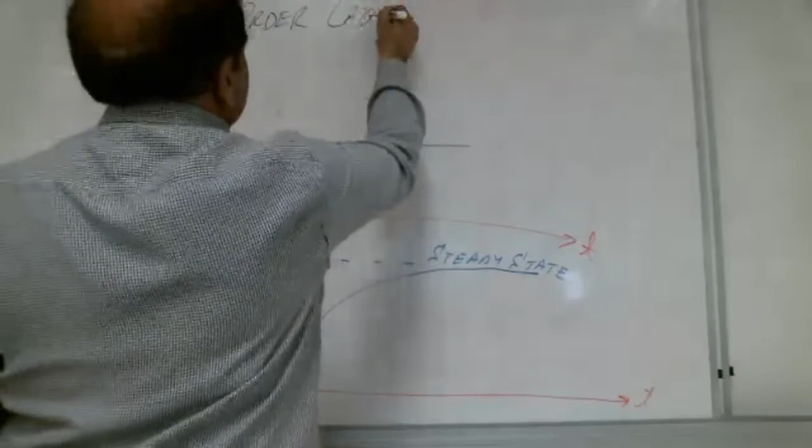What was FOLPDT, Shabab? Somebody remember? First order lag plus dead time. FOLPDT, have you guys heard this word before, Shabab?

FOLPDT. Shabab with me? Okay that's good, mashallah a lot of brothers are writing yes. So have you guys heard FOLPDT? A lot of brothers are saying in practical. Yes, that's good.

Is this system FOLPDT? This input and output, is it FOLPDT, Shabab? I think yes. Think again please. Dead time, where is dead time here? Where is the dead time?

Where is the dead time here? The time of the change of the constant, teacher. Here T2 minus T1, input and output are starting at the same time. So here there is no dead time, it is zero. So how will we make the dead time here?

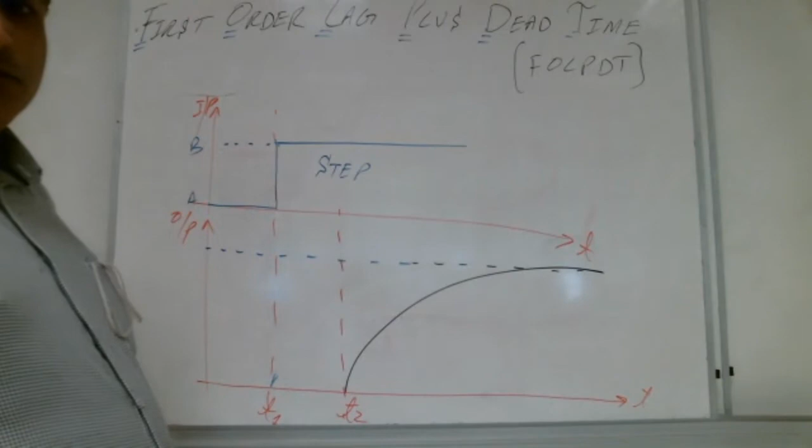FOLPDT, so again we need to define the characteristics. How many characteristics are there, Shabab, for FOLPDT? Yes Shabab, how many characteristics?

What is the first one? The first characteristic of FOLPDT, Shabab - first order lag plus dead time. So once again, if the output starts increasing gradually and goes to steady state, it is first order.

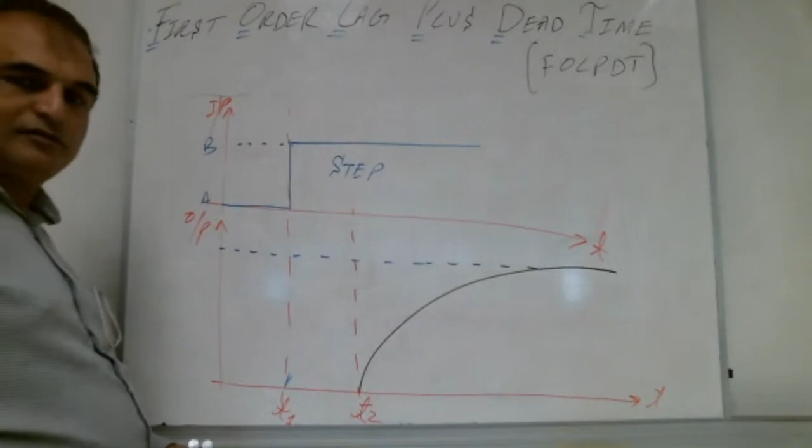Why do we say lag? What is the meaning of lag, Shabab? The output is after the input. Input is before, and output comes after input - that is the lag. So the output is lagging behind the input.

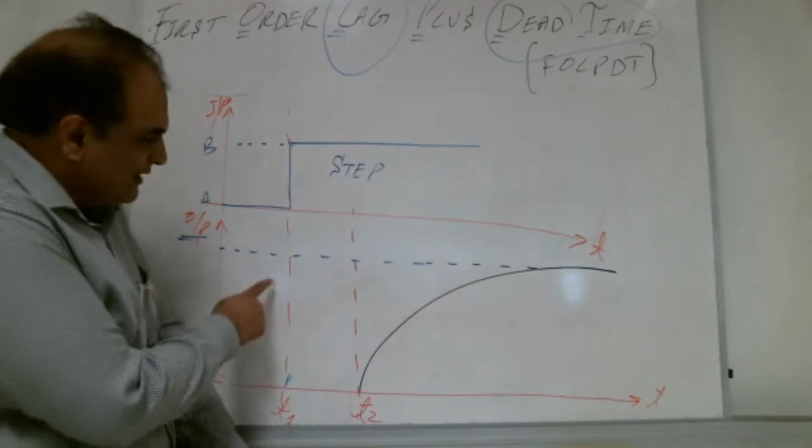So lagging is done. What is dead time, Shiva? Dead time means T2 minus T1. T1 is the time when we apply the input, and T2 is the time when the output appears. So this is the dead time.

So lag means the output will start after the input. And dead time means the output will start after a time delay - then the output will start. That is what dead time means.

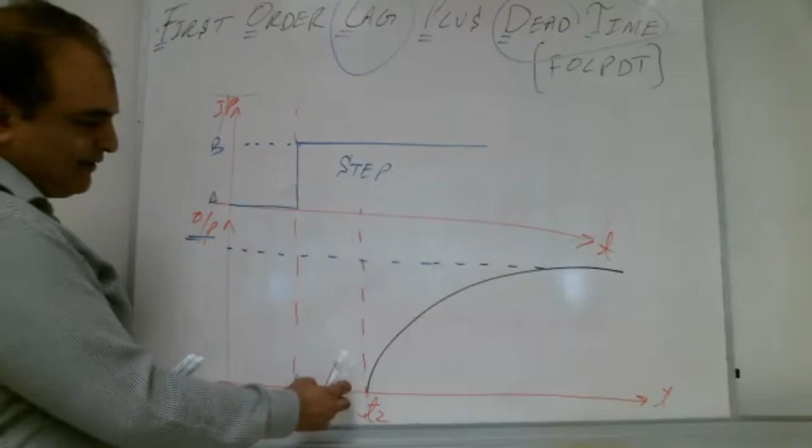Can you repeat lag, teacher, I have bad connection today. Lag means, see, we apply the input, and the output comes after a delay time - there is a delay T2 minus T1. At this time the output starts. So output is lagging behind the input. Input is leading, output is lagging.

Okay, if any other brother has a question, please ask. Okay, now we're going to start with Shabab's gain.

So this was at place A, we bring it at place B. Okay Shabab, what is gain? Process gain, number one. KP. Yes Shabab, how do we define process gain?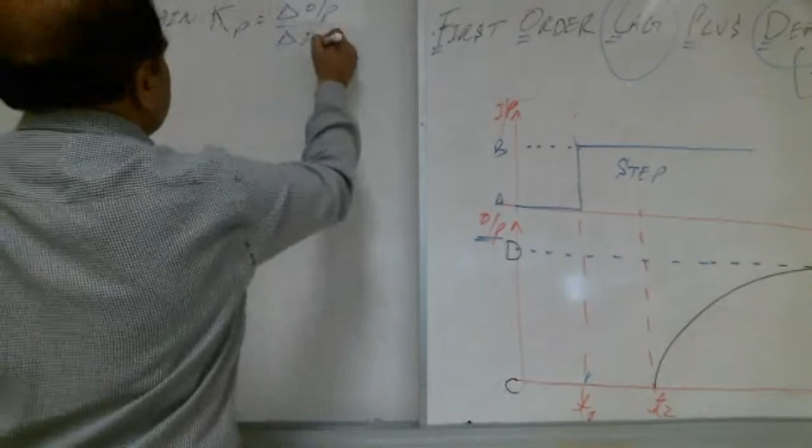Delta output over delta input. Delta means what? We don't say delta, we say change in output over change in input. So how much change in output? D minus C. D minus C over B minus A. Very good.

Number 2, Shabab. Process dead time, TD. How do we define TD, Shabab? T2 minus T1. Very good. T2 minus T1. What is T2, Shabab?

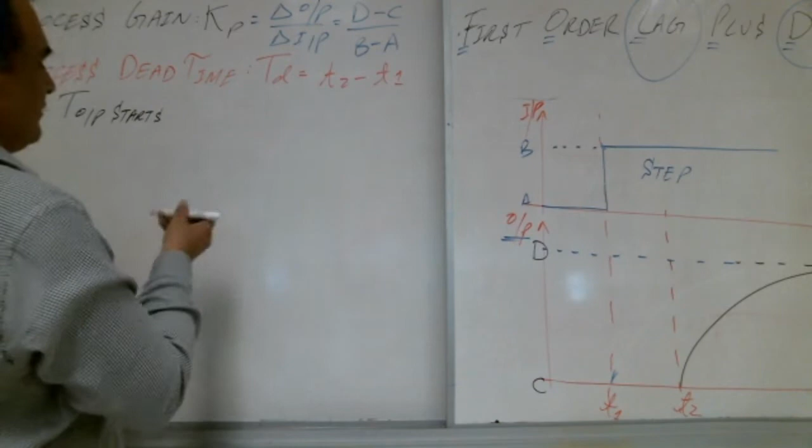T2 is the time - starting of the output, the start of the change of output. And what is T1, Shabab? Time when the input is applied. But see, this is T1, we apply the input, and this is T2, output appears.

What is number 3, Shabab? Time constant. Yeah. Process time constant, tau. How do we define tau, Shabab? 63.2% of span.

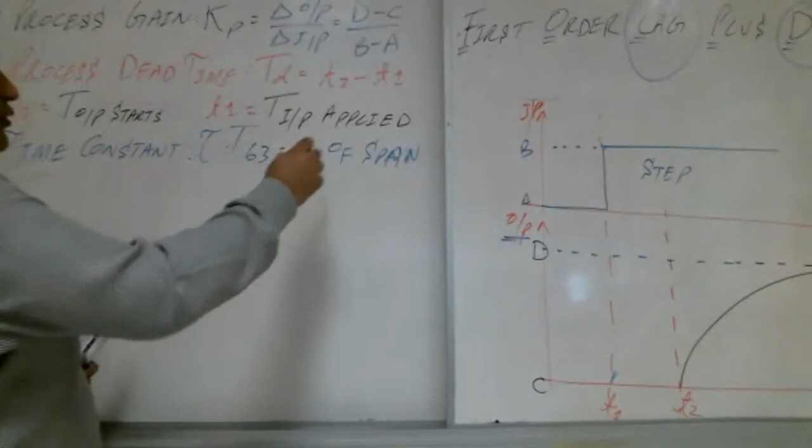Time to reach 63.2% of span. So what is the span here, Shabab? Step number 1, what is span? D minus C. Imagine C is 10 and D is 90. So what is the span? 80. Very good.

Step number 2, take 63.2% of span. Say it is E. So how much is 63.2 into 80, Shabab? Where is the calculator, teacher? 50.4. Some brother is saying 50.4. Shabab, verify it. Yes, 50.4.

Very good. 50.56, teacher. Yes, Shabab, verify. Everybody verify this one, 50.56 or 50. Whatever, please verify. Right Shabab? Okay, step C.

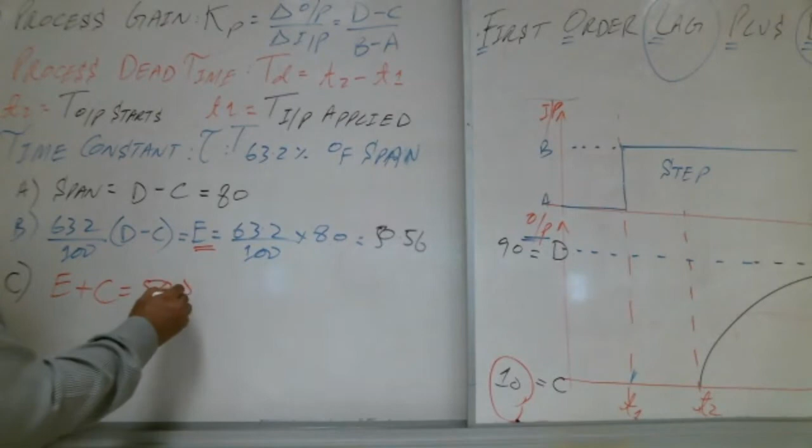What is step C, Shabab? Add the initial value. So this is E plus the initial value. What is the initial value here, Shabab? 10. So E is 50.56 plus 10, how much? 60.56, right Shabab?

Everybody with me, Shabab? That's good. A lot of brothers are writing yes, that's good. Now we will find 60.56 here, we say approximately here. So it is E plus C, that equals 60.56. We draw a line here, Shabab - we draw a straight line here and bring it down to the time axis.

What is this time, Shabab? T3. Very good. A lot of brothers are writing, mashallah. Very good, so this is T3.

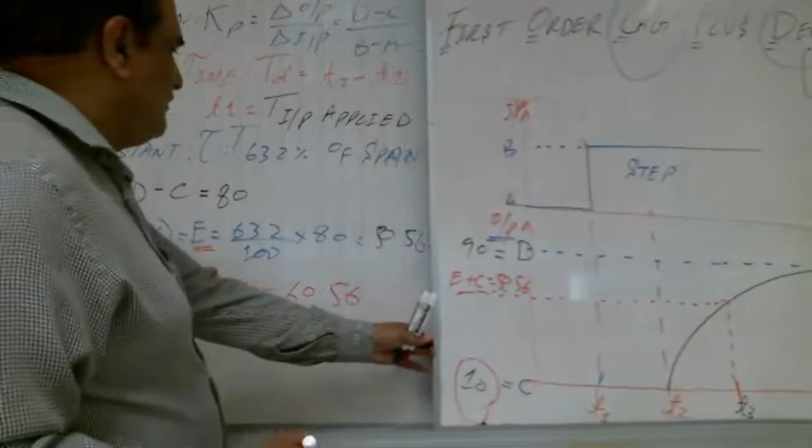So what is time constant, Shabab? Time constant is T3 minus T2. What is T3, Shabab?

What is T3? T3 is the time output reaches, or just reaches, 63.2% of span.

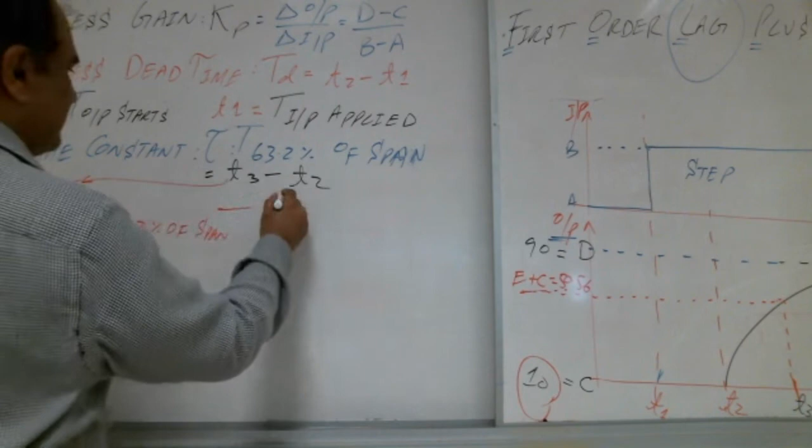What is T2? Which time is T2? Input applied at T1. Output starts. T2 is the time output starts, before output reaches 63.2%.

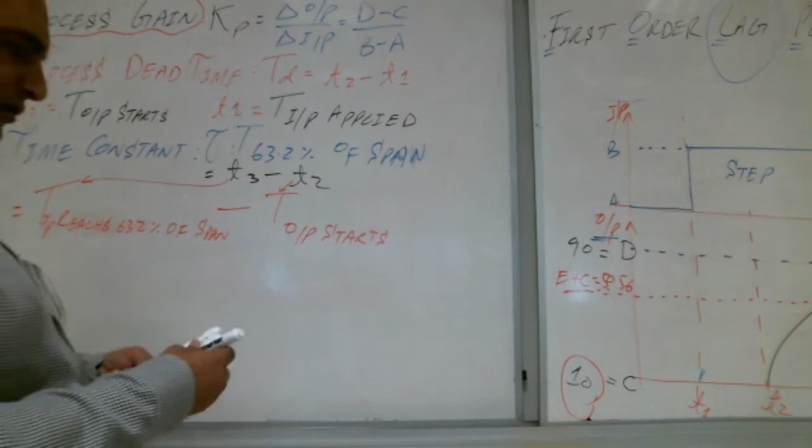What is ideal gain, Shabab? Ideal gain is infinity. The ideal gain is infinity. We want ideal gain infinity. Practically we know it is not possible, but that's what we want. Any question up to here on ideal gain?

So we want all our processes to give ideal gain.

What is ideal dead time? It is 0. Ideal dead time is 0. We want as soon as we push the accelerator, our car should start. But we know it is not possible. There is always a dead time between when we push the accelerator and the car starts. We want as soon as we turn on the switch, the light should be on. Again, we know it is not possible. So there is always a gap, a dead time, between the input applied and output starting.

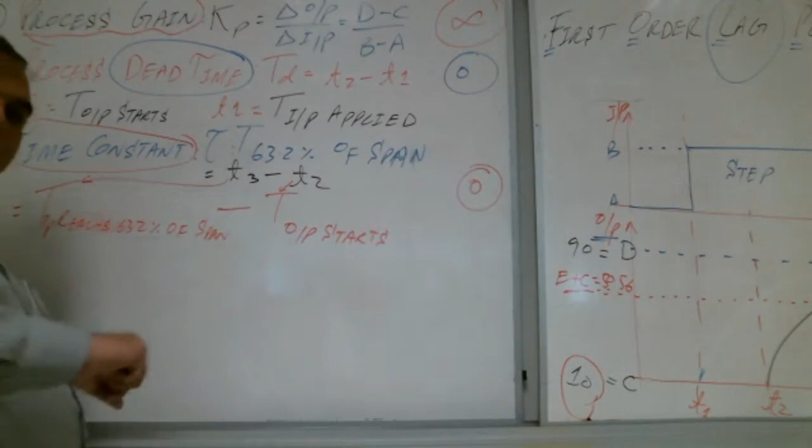What is the dead time? Dead time is when you push the accelerator and you wait for the car to start - that is the dead time. Maybe it's a nanosecond, maybe a microsecond, but you have to wait for the car to start. On the other hand, time constant - once the car starts, output starts - how long it takes to reach 63.2%. Whoever reaches 63.2% faster will reach maximum faster. So here we play with the gears, the clutch, the accelerator, making a balance, and we change gears very fast in manual car - we play with the time constant.

We cannot play with the time constant in an automatic car. In an automatic car, the changing of the gear is proportional to the speed. If the speed increases up to some limit, the first gear will change; if you increase the speed more, the second gear will change. But we cannot control it ourselves - it is controlled by the car automatically. Any question up to here?

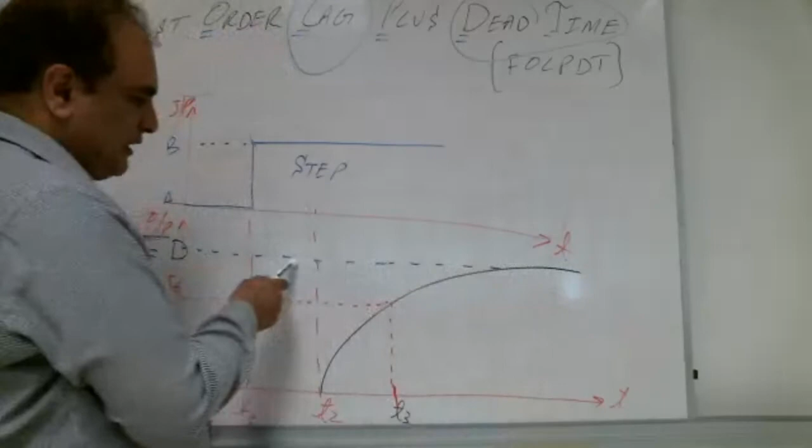See here, this is starting from here. Imagine this is 10, or 0, right? You are with me, brother? Yes, I am with you. Okay, now it is starting from here and it is reaching the steady state, this one, right? So it's 63.2%.

This is the time when it reaches 63.2%. So this is the time constant. T3 minus T2 is the time constant. So if something is reaching 63.2% faster, it will go to steady state faster. This here, Shabab, is dead time.

Now imagine there is another process that is going like this, to steady state, like this, right? With me? So here its time constant will be where? Here, right? It will reach 63.2% here.

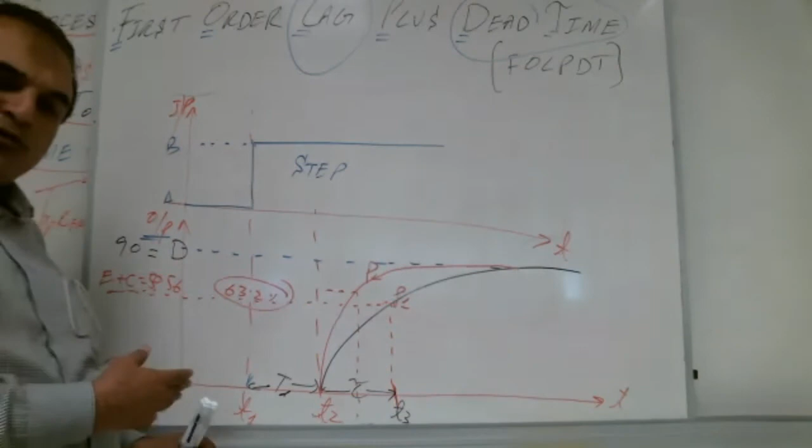So which process is faster? Say this is P1, this is P2. So which process is faster? P2, P2, that's it. So it means you understand. P2 is faster, its time constant is smaller. So whoever's time constant is smaller, that will be faster, right?

Right, so what do we want? We want to go to the maximum in 0 time, like this one we want, that's what we want. So we want to go to maximum in 0 time, that's our ideal, right? So whoever has small time constant, the process will go to steady state faster.

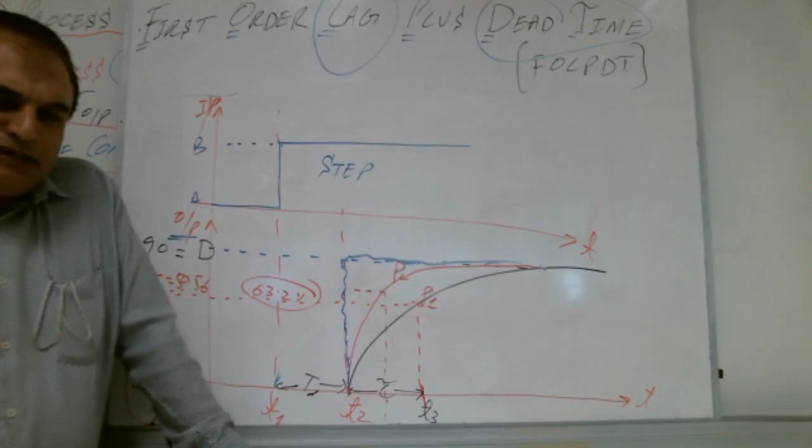How can I find T3 without the graph? Without diagram, you think you can find it? I don't think so. Yeah, that's it. So you have done the experiment, right? Yes. How many experiments did you do? Maybe 4 or 5, teacher. 5, you did, right?

And how many assignments did you do? 4 or 5. So after that, you are asking me, can we find T3 without a diagram? Is it possible, teacher? My question is a good question because I want to ask how to find it better.

Sorry? Yes, please. If I don't have a graph, I don't have the program, how can I find this? Maybe I have a good way, so I ask you this question. I understand, yeah. You need something, either you need the data or you need the graph, right?

Yes. Do you remember question 7 in our lab? Question number 7, you remember? Yes, teacher. In question 7, is the graph given? No graph is given. What is given? Data is given. You remember that? Yes. So with the data, you can find the time constant, or with the data you draw the graph and then find the time constant, right?

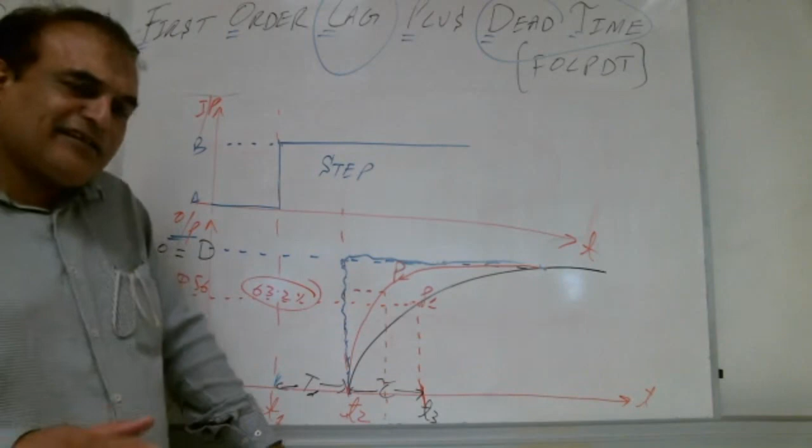Yes. So at the end you need something, either it is data or it is some graph, something you need to find the time constant. Without data, without graph, it is impossible, it's like we are not able to find the constant, maybe something else, right?

I know and I understand, teacher, and I would do all the lecture, but maybe I want the first way. That's good, that's good, yes brother. Yeah, that's good, that's good. Your question is valid, your question is good, your question is not bad, your question is very good, your question is valid. Is there any other way to find it? Either data or graph, that's what we prefer, right?